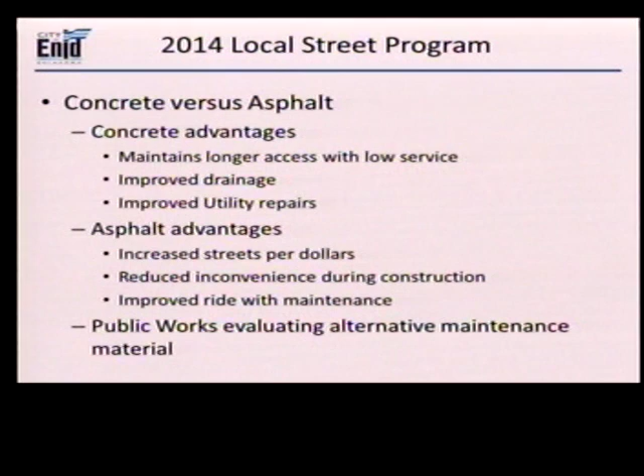And we have also, the guys at Public Works are looking into another maintenance tool, material, which they'll speak to at the end of this presentation.

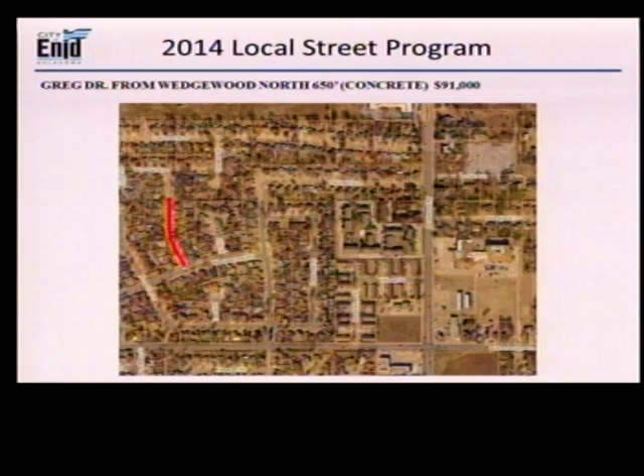Based on those numbers, we're a little shy of what we think our budget is. We know the Public Works guys have tried an overlay material, a maintenance material, on a couple of streets, and they'd like to present that to you.

Do you have any questions? I do. Chris, we had discussed, I believe it was in a study session a few meetings ago, Broadway between, say, Washington and I think we were going over to what? Maybe 9th or 10th?

That's an arterial street. This is local street program, street and alley funded. Arterials are funded out of capital improvement, and so we'll be bringing those to you at some future date, the status of that.

And we're thinking that will probably fall within 13-14, maybe? It's a complicated matter. It's a big street. What we're having is the issue from Washington to Grand. That street is in pretty sad shape. There are some very old water lines under it. It's also very wide.

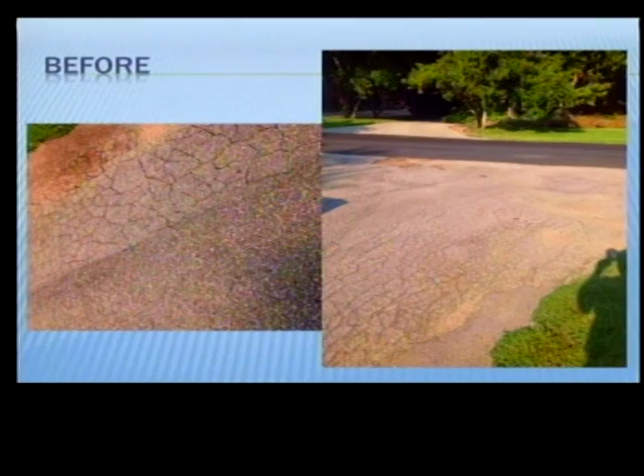This is the before, and I'll get you a better picture of what we have. Here's one of the areas we fixed. We also did what they call a double seal in that area to bring it up to the same material. This picture shows pretty well what that material looks like when it dries, about a quarter inch thick, extremely hard.

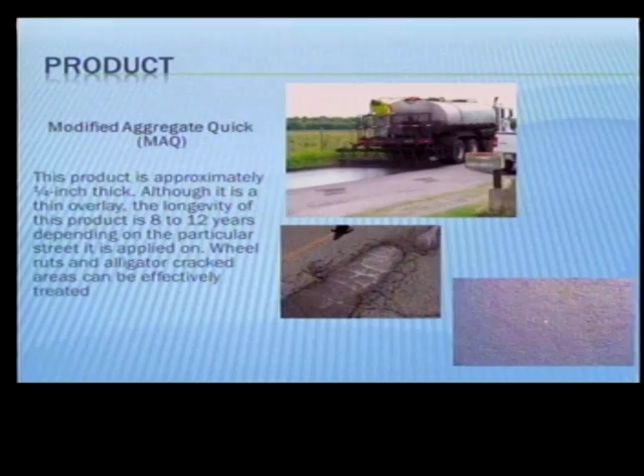The modified aggregate quick mix actually bonds that existing asphalt together. It binds it like a solid piece of poured concrete. It also fills the crack, what we call a crack seal, and leaves about a quarter inch layer on top. After that, when we did our patchwork, we tried to level it out as much as possible, and you get a pretty good street when you do that.

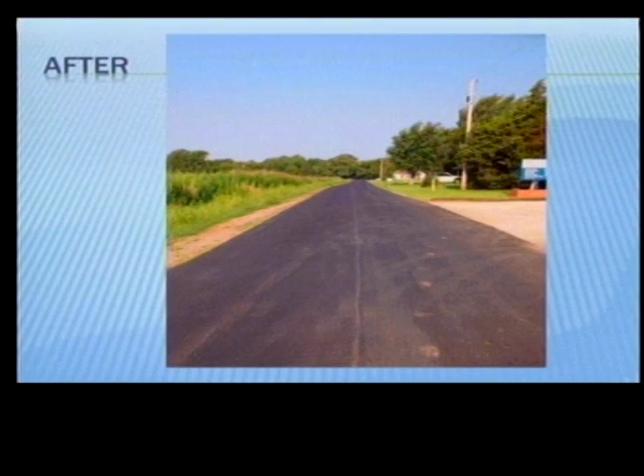This is the entryway into Rolling Oaks off of Cleveland. As you can see, this street's full of alligator cracking all the way down. That's afterwards, that's Quellwood Drive right there. That's an extremely nice street now.

The special problems we have right here are that you cannot go in and run a 3-inch overlay because you'll run the water right into people's houses due to the drainage problems we have. This is thin enough, it has the bonding abilities to pull that together and hold for 8 to 12 years. An excellent material to use and extend the life of about 27% of our streets.

At $3 and a few cents a square yard, it's very affordable. You're looking at $500,000, and you're looking at getting a return of about 6 to 7 miles. 6 to 7 miles is a lot of street.

You're looking at $1 million a mile for concrete. Sure, it lasts 30 years, but that's just 1 mile. On an arterial street, I think that's well worth it because there's lots of cars that use that arterial street. But on residential streets, where we can extend the life of those streets by doing this kind of process without having to redo it, that's a good thing to look at.

I think we haven't really maintained our streets well in the past because we've been thinking about those concrete streets and those 3-4 inch asphalt streets, because we didn't have a product good enough to go in and bond that stuff together to increase the life. We do today. And we tested everything to find out too.

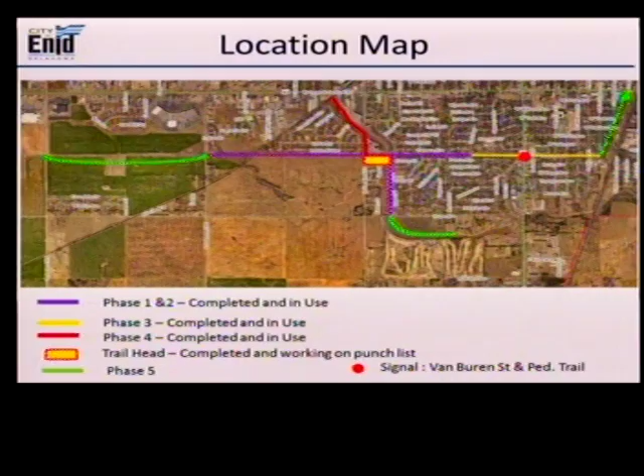Now, if you want to extend from France to the downtown, each has its own appeal, but the latter one, the France to downtown, has some critical challenges in real estate and right-of-way acquisition. Now, we are pursuing those real estate acquisitions to encourage that and enable that development, but that's going to be time-consuming and unlikely that we'll get that done in this budget year.

So you fall back to then what you can do from westward expansion from Oakwood or southerly along the core channel. The easiest one and the first one, the lowest hanging fruit, is the core channel trail to Meadow Lake. And then after that is the expansion west to Oakwood. Did I catch that right, Morale?

I probably should be the last one to complain, because virtually all of the trail is in my ward — me and Mr. Stuber. And that's why I'm concerned: if we want the trail system to continue to have popularity with the whole city, we need to get it into some other areas of the city.

I absolutely agree, and I'd like to see this — I think we talked about this during our budget hearing not just a couple months ago, which is why that $2 million number got thrown out there for trails.

We want to see it connected downtown, because that goes somewhere, and that opens up a lot of possibilities. If we get to downtown and across Garriott, there are a lot of options for heading east and getting a really densely populated part of our community connected to a really great, not just recreational tool, but frankly a mode of transportation.

The college is already built. That's the second part of this - the universities, and I think everyone needs to go out there and look at it. They did a phenomenal job between the Northwestern campus and the NOC campus. A nice 10-foot wide concrete path with built-in lights along the side, and it's gorgeous, and I'd like to see us connected to that. It's also only 300 yards long, and therein lies the problem.

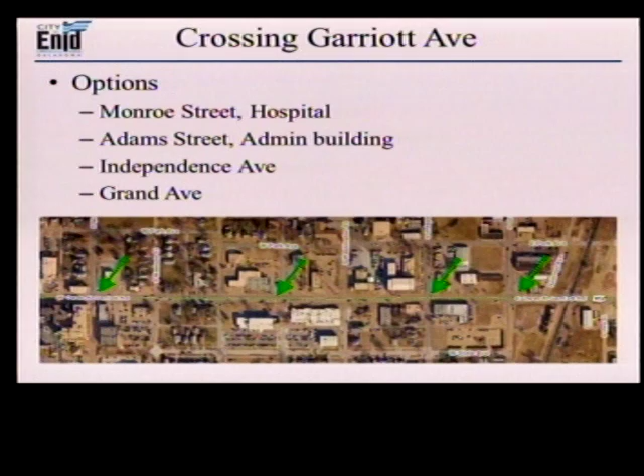Those were the 4 crossings that we looked at. Monroe Street over by the hospital, on the south side of the street, the sidewalk in the street is very congested. For example, on the east side of Monroe, there's parallel parking, so there's no way to put a trail. And on the west side, it's very limited as well.

Adams Street, right outside here, requires that we upgrade the pedestrian light, because otherwise the impact to traffic will be very significant, and we would probably run into a few roadblocks with that. We looked at Independence.

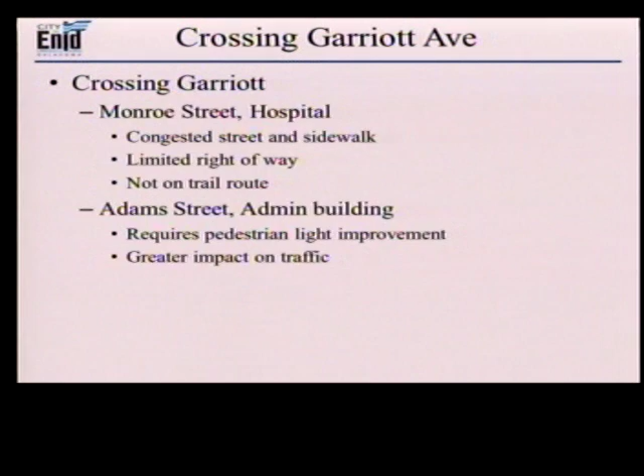On the south side, you could probably make it. It does give us access to the soon-to-be green space on the north side. Over at Grand, once again, you get access to the green area, and we have a little bit of property on that side, on the south side of O&K on Grand. From the criteria that we use to evaluate these, we believe that crossing at Grand is the right place to go.

As far as routes, understand that as we go through this, we're starting at Frantz, which is south of the Enid High School football stadium. We've looked at going north, straight north on Independence Avenue, come up to State Street, which is right here on the south side of this building, jog over to Grand, get across. The alternative route is at Illinois, go over to Grand, and then come up.

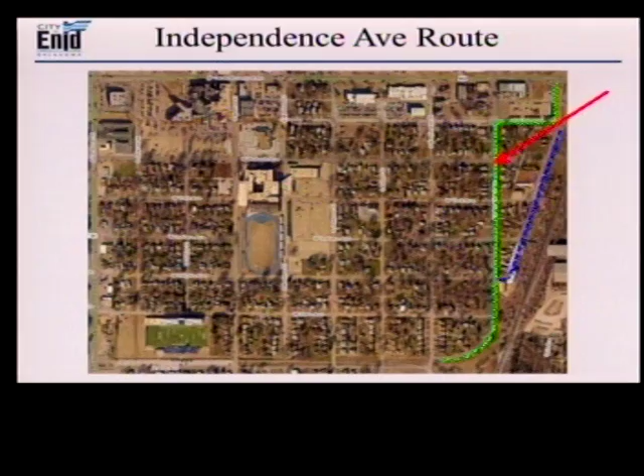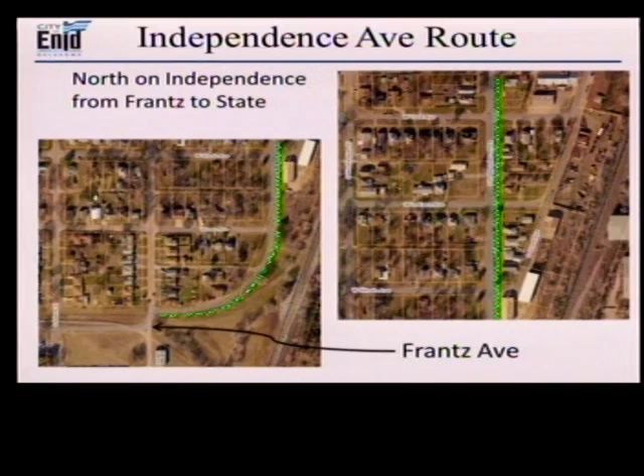Now, we've not done all the necessary investigation on these 2 routes. There's a lot of things that we'll have to go and address, and there'll be property owners that we'll have to talk to. For the Independence route, we start at Frantz, go around, go straight up Independence, go all the way to State, to here, and jog over.

We're looking at approximately 17 independent property owners. The right-of-way there appears to be somewhat larger, based on how far set back from the curb the current sidewalks on that particular street are, which tells me that we may be able to get away with not having to buy a lot of right-of-way. The one thing we do have to be considerate of is now we're talking about putting a trail on a residential frontage. They come out their front door, and there's the trail.

We cross their drive with the trail. I'm not saying it's right, I'm not saying it's wrong. We have to be considerate.

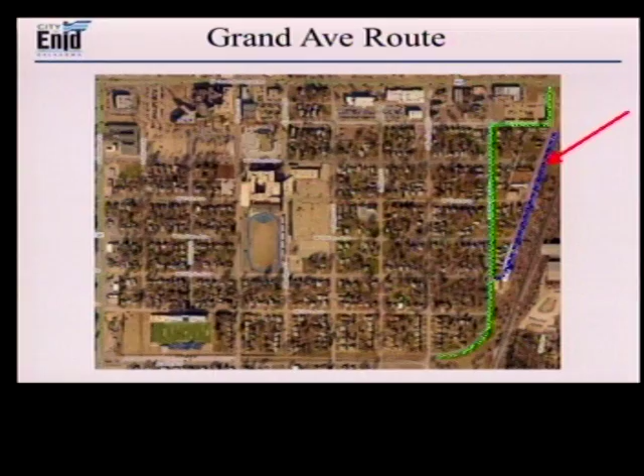The other route we looked at was Grand. To obviously start at Frantz again, run up to Illinois, which is the same as the beginning route of the other side, and then jog over on Grand.

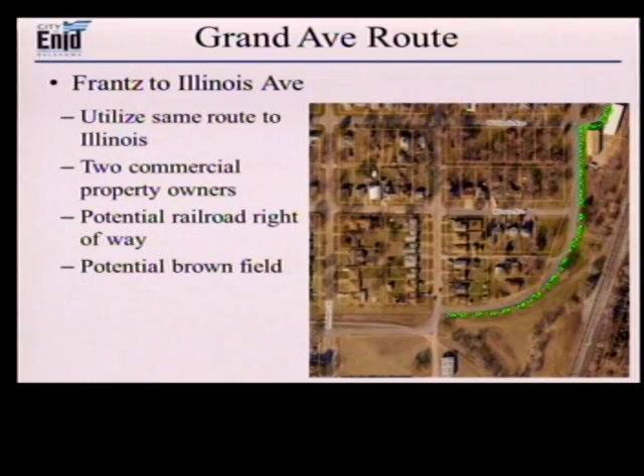The things that we found that could present some problems - obviously there's two large commercial owners in that area. There's a potential right-of-way, railroad right-of-way in this area. We don't know that for a fact, but we're in the process of digging that out. And then there's the potential of a brownfield.

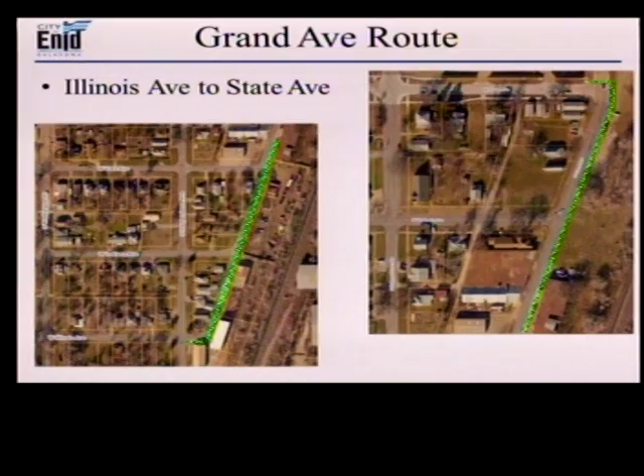Potential of what? Brownfield. Can you help me with that? A Brownfield grant requires that you do an environmental assessment, phase 1, before you take title. So we would have to get permission from the property owner to do that phase 1. Once that is complete, then we can actually take title, but then we have to do the second phase of the assessment, then cleanup, then construction. The EPA only allows $200,000 per year per grant, so it could be up to a 3-year process before it's clean and able to be constructed on.

Thank you. No problem. And what area are you talking about there, as far as the brownfield potential? Anything on that east side where there's all that industrial work? On Grand, not Independence. When you cross Garriott, do you use the current sidewalks on Grand or Independence?

Then if you are, and that's what we want to do, then yeah. When we finish the parking spaces, aren't we going to put the sidewalks and make it a 4-lane street from Garriott to the event center? I have to go look, I have to double check on that. That's in the long-term plan. Well, long - what's long-term mean? Well, beyond this budget year.